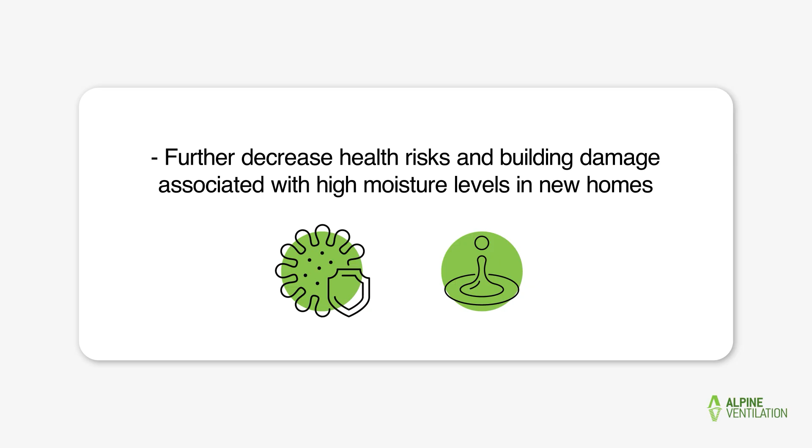The 2022 NCC Condensation Management provisions build on the initial 2019 provisions and are developed to further decrease health risks and building damage associated with high moisture levels in new homes. They are included in both Volume 1 and Volume 2, and are therefore mandatory in all residential home construction.

This video is designed as a simple and practical summary of one of the three sections of the regulation, including suggestions for builders and contractors with developing effective, simple and cost-efficient solutions.

For simplicity's sake, we will refer to the section numbers of Volume 2, the Condensation Management section. 10.8 has three subsections. Subsection 10.8.1 deals with insulation and vapor permeable membranes. 10.8.2 covers exhaust systems and is covered in this video. 10.8.3 covers ventilation of the roof space and is reviewed in our next video.

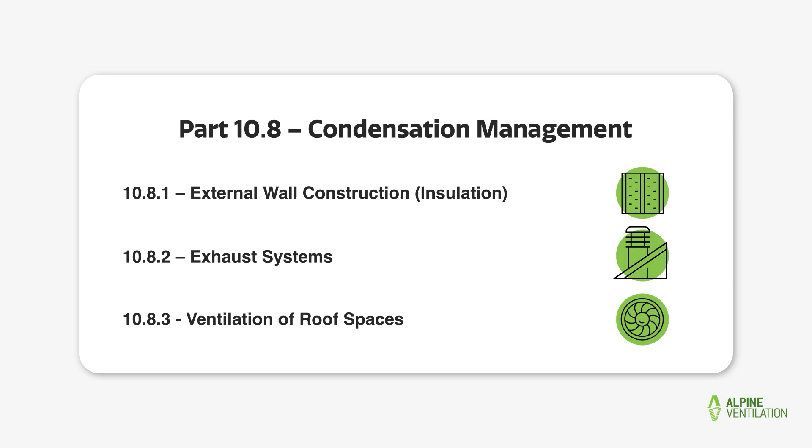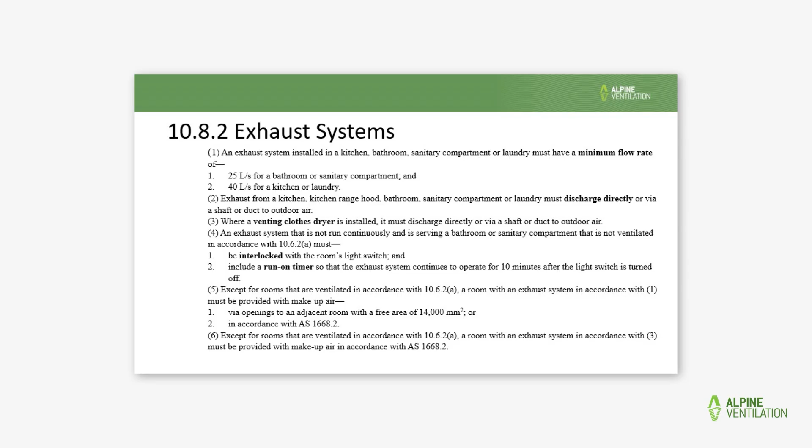Here is an excerpt of the NCC regulation. We will explain this in simple and practical terms.

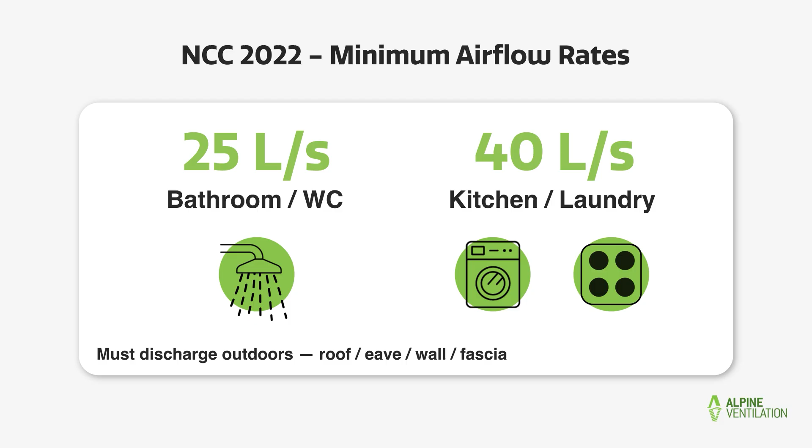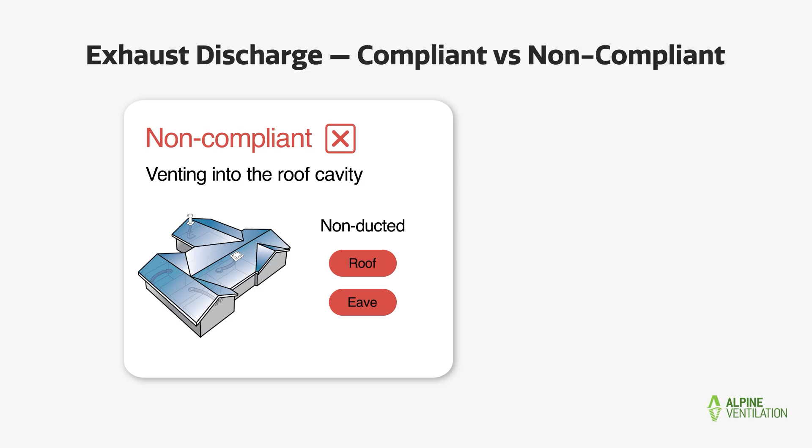Exhaust fans now must be treated as range hoods traditionally have been, and air must be exhausted externally. It is no longer an option under NCC regulations to vent fans up into the roof cavity and use a combination of non-ducted roof and eave vents to recirculate the air in the roof cavity. In our experience, most builders are using a combination of ducted roof, wall, eave, and now also fascia vents to suit different house designs and styles.

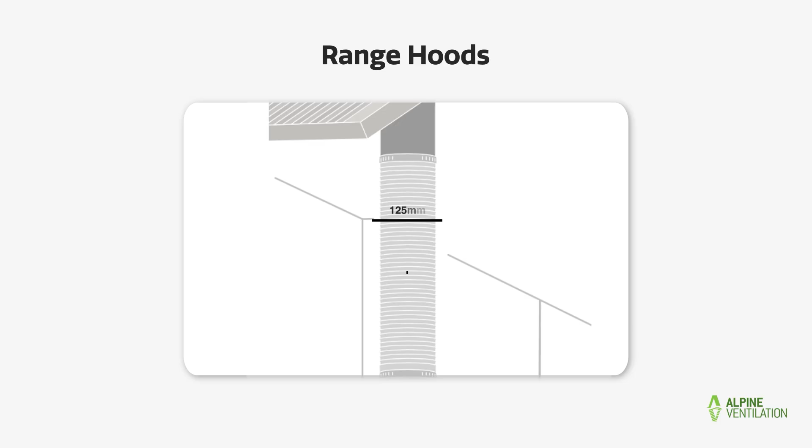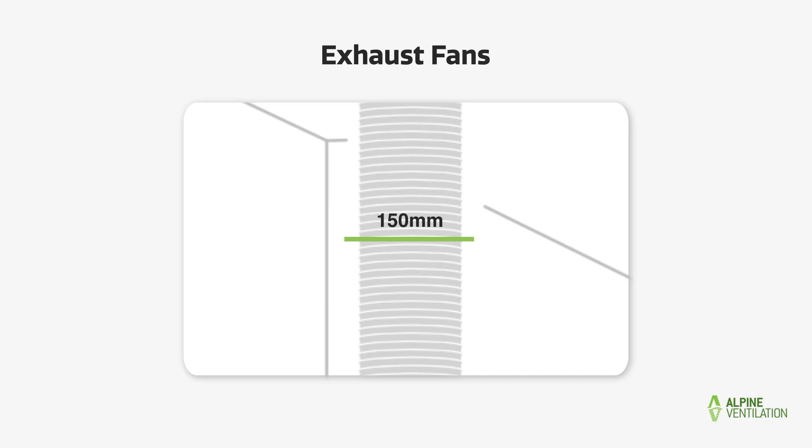Range hoods usually require 125 or 150 mm ducting. The most common duct size for newer exhaust fans is 150 mm diameter. Let's take a quick look at all four options.

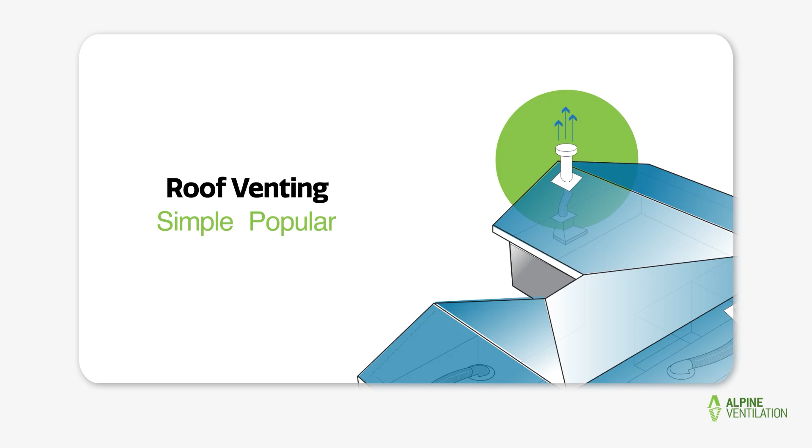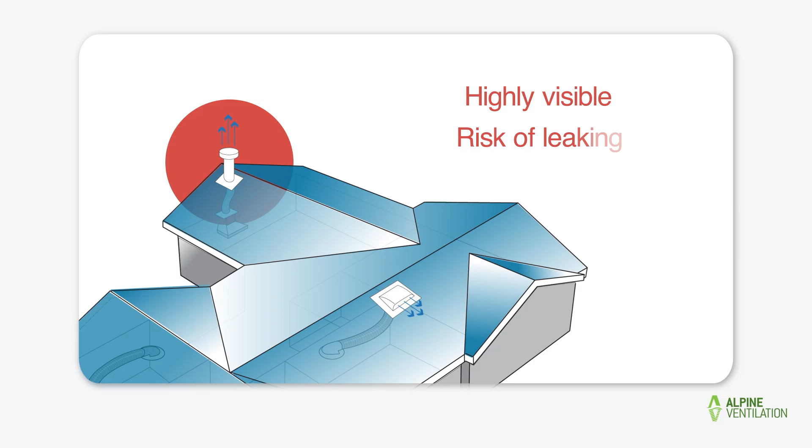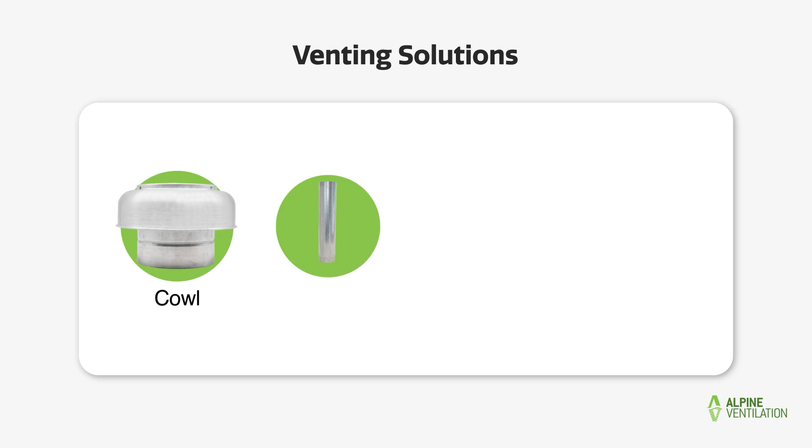Ventilation via the roof has long been popular for venting out range hoods, and remains a simple and popular method under the new regulations. Downsides include roof vents being highly visible, and as with any roof penetration, there is a risk of leaking. We have developed multiple solutions, and all options are BAL 40 compliant, from the traditional cowl, pipe, and flashing, to our compact roof vent.

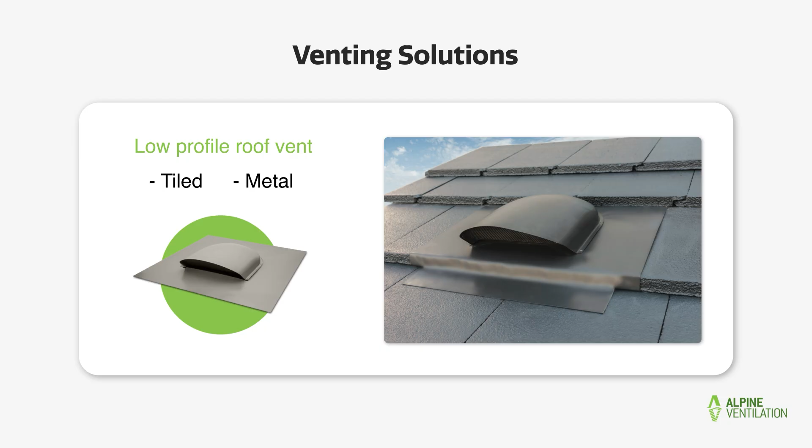Plastic options also exist. Our preferred option is the low-profile roof vent, suitable for tiled or metal roofs and available in 9 Colorbond colors. This can even fit under a solar panel and hence becomes almost invisible on the roof. Check out the separate video on this range.

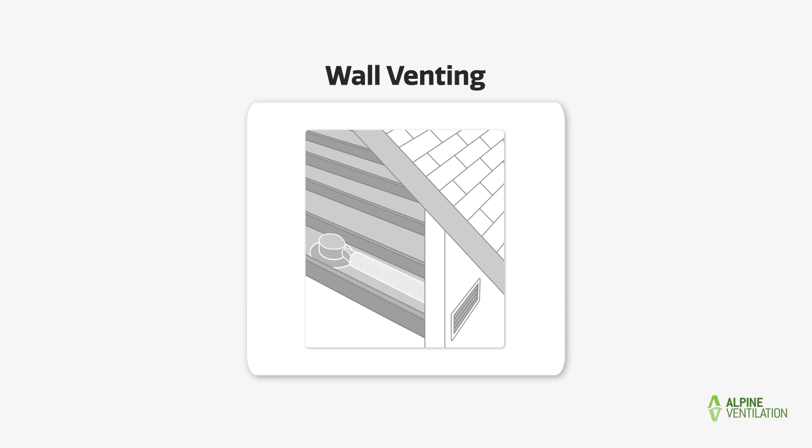Venting exhaust fans and range hoods via the wall is another option, and is particularly popular in single-story homes, especially in brick or weatherboard, but also in cement-cladded walls. Wall venting is discreet and usually well protected from the weather.

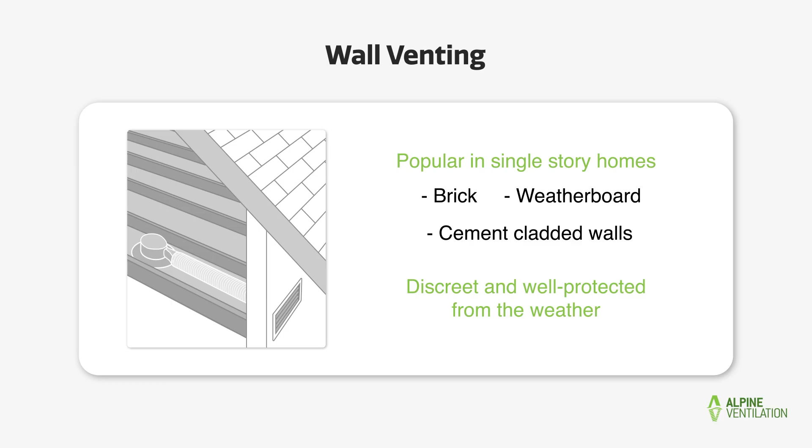Plastic vents may be used, but ensure that plastic is UV stabilized, and check your BAL rating. Generally, aluminium is a preferred material. We carry standard BAL 19 grill vents with mesh. Some prefer gravity vents that prevent backdrafts.

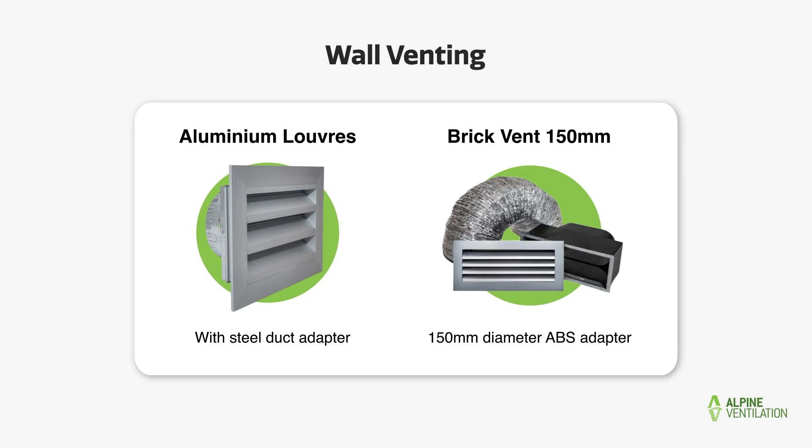Our preferred options are the BAL 40 double brick aluminium weatherproof louvre with steel duct adapter, or the single brick aluminium louvre vent with a 150 mm diameter ABS adapter for an even more discreet look. There is a separate video on this range as well.

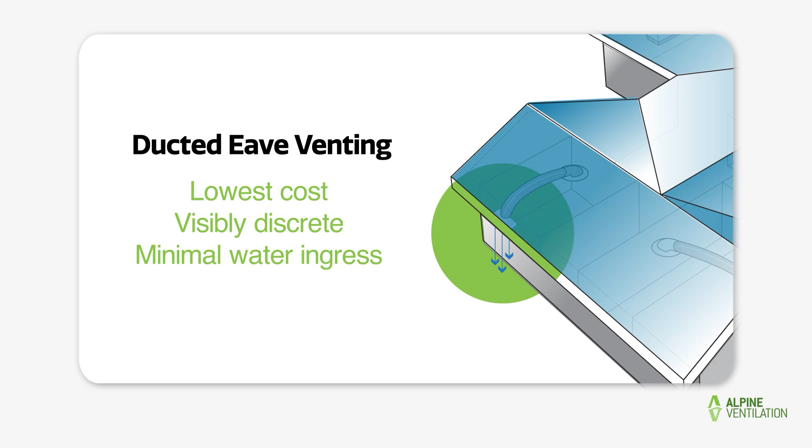Exhausting air via the eave with ducted eave vents is the lowest cost and arguably the most visibly discreet alternative. It also offers minimal chances of water ingress. The downside of eave venting is that many modern homes no longer have eaves. However, if a home has eaves, this can be a great option.

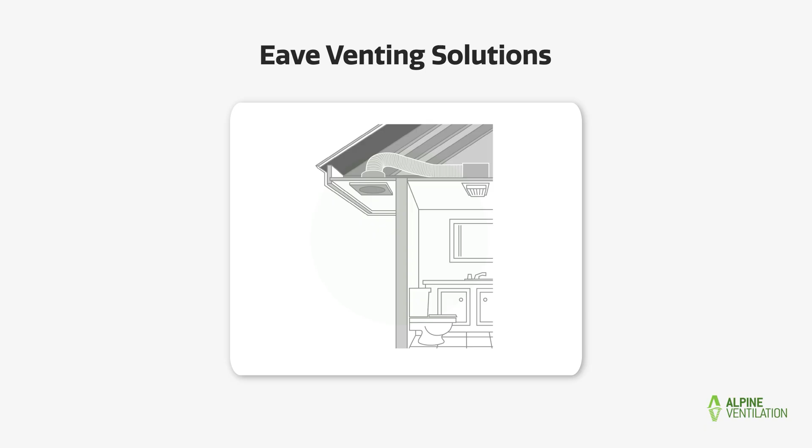There are standard screw-in plastic eave vents. A big improvement is our snap-in eave vents with a longer neck and 3 different face designs to choose from. All have mesh and are BAL 29 compliant.

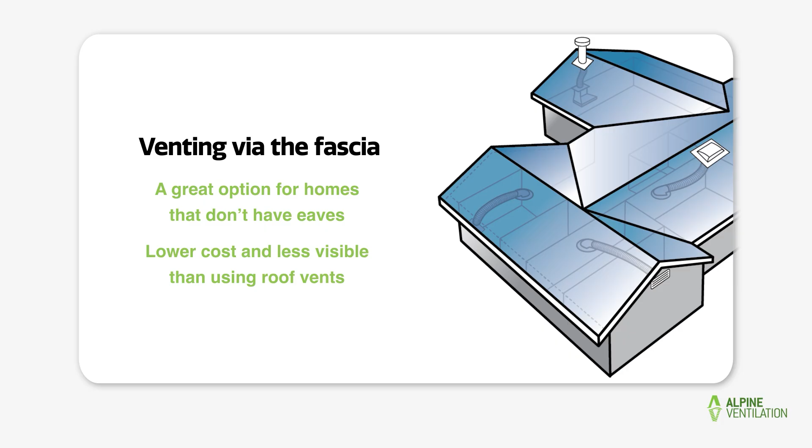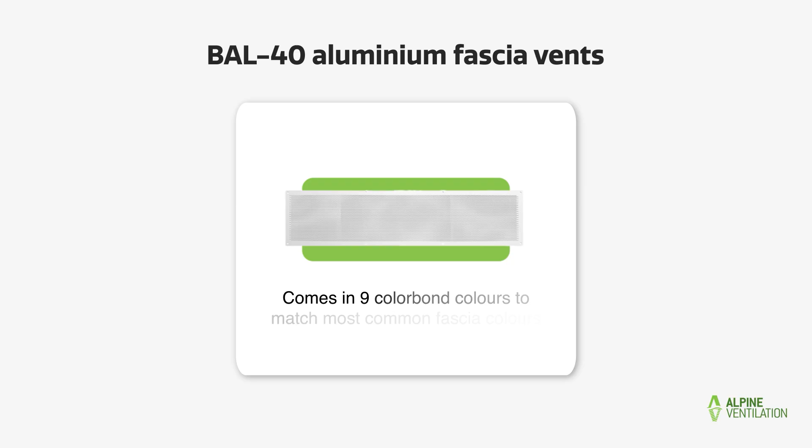Venting fans via the fascia is also an alternative, and can be a great option for homes that do not have eaves. This is a new method, but one that is quickly growing in popularity as it is lower cost and less visible than using roof vents. This is usually installed by the roofing contractor on new builds. Our new BAL 40 aluminium fascia vents come in 9 Colorbond colors to match most common fascia colors.

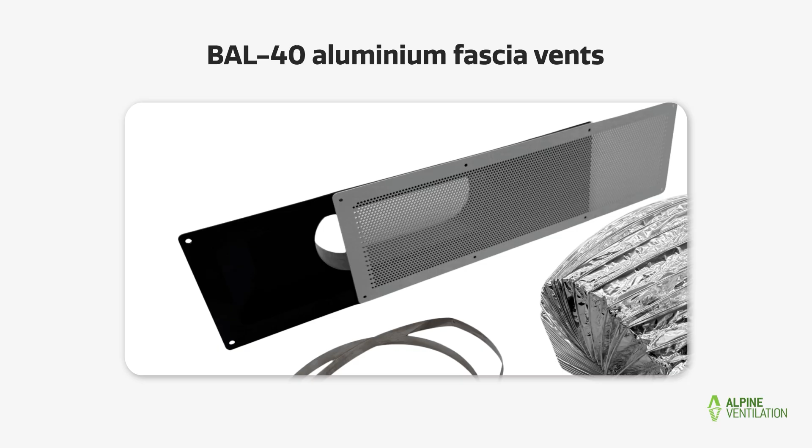A rectangular hole is cut in the fascia. The aluminium face rivets onto the front of the fascia with an adapter attached to the rear for connecting to ducting.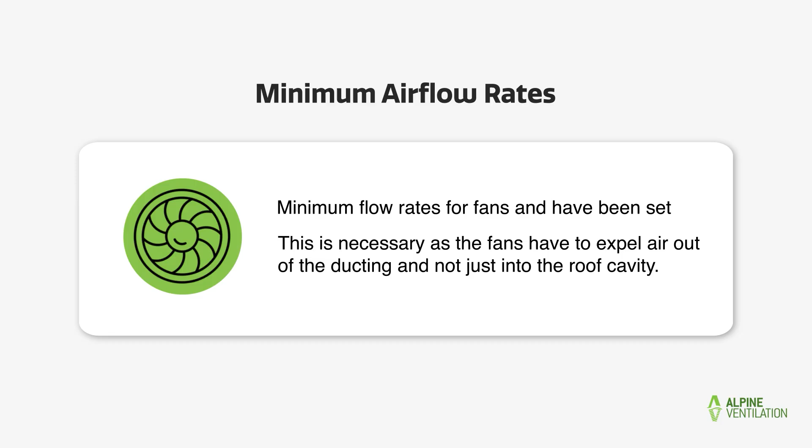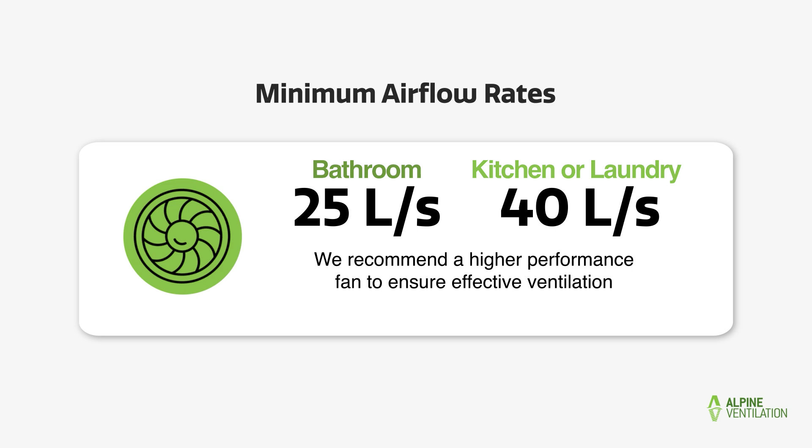Minimum flow rates for fans have been set. This is necessary as the fans have to expel air out of the ducting and not just into the roof cavity. These minimum rates of 25 or 40 litres per second are quite low, and we would recommend a higher performance fan to ensure effective ventilation. Quoted flow rates are under laboratory conditions and will always be lower in residential applications.

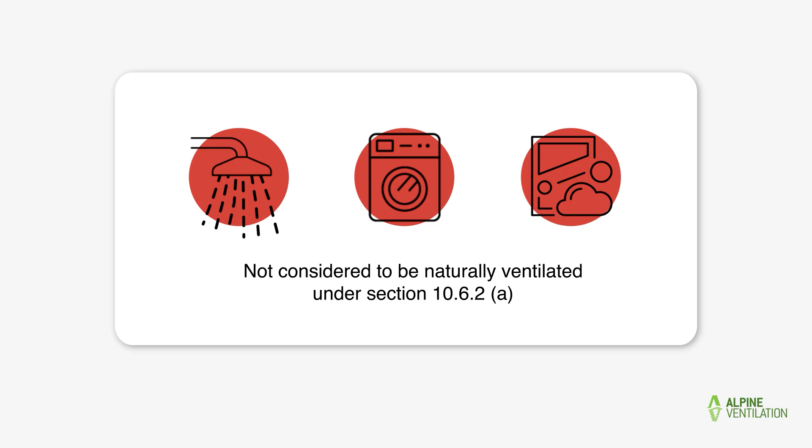If a bathroom, laundry, or sanitary cabinet is not considered to be naturally ventilated under Section 10.6.2a, the exhaust fan needs to be interlocked with the light switch.

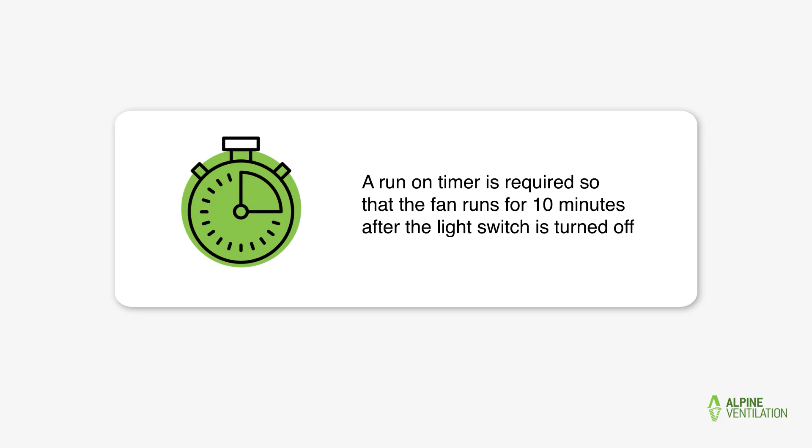Additionally, a run-on timer is required so that the fan runs for 10 minutes after the light switch is turned off. Some fans have a built-in run-on timer, others do not, and require a run-on timer to be hardwired into the fan. When selecting an exhaust fan, consider using one with a built-in run-on timer for easier and lower cost installation. Also ensure that the fan meets the minimum airflow requirements.

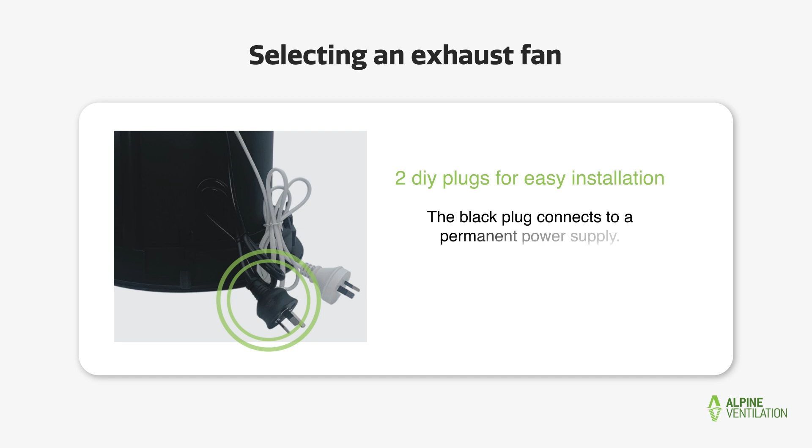The pictured 250SX exhaust fan has a run-on timer with 2 DIY plugs for easy installation. The black plug connects to a permanent power supply, and the white to the light switch loop. At 104 litres per second, the fan is well over the minimum requirements, so is ideal for long duct runs.

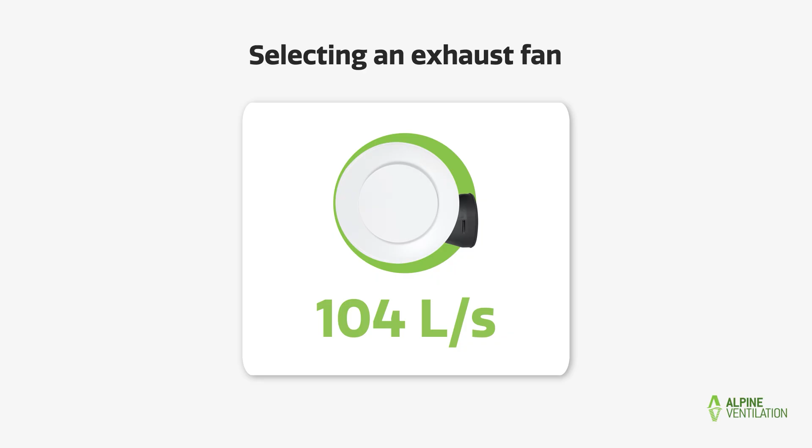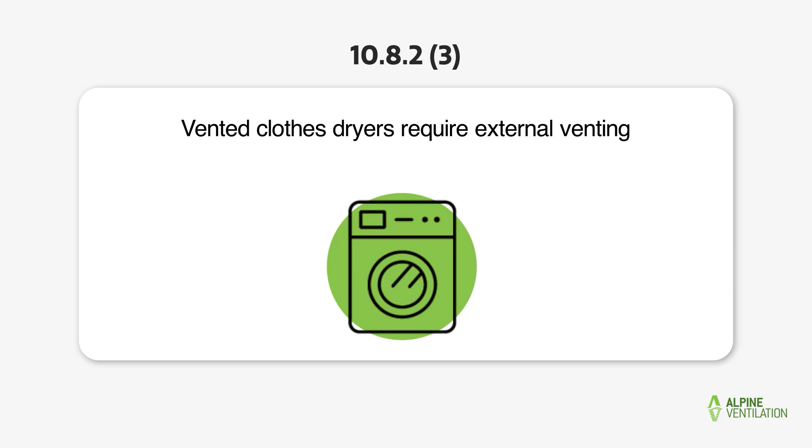Under 10.8.2 (3) vented clothes dryers require external venting. This is usually done in 100mm diameter ducting through the wall with a kit similar to the one pictured. Condenser and heat pump dryers do not need external venting.

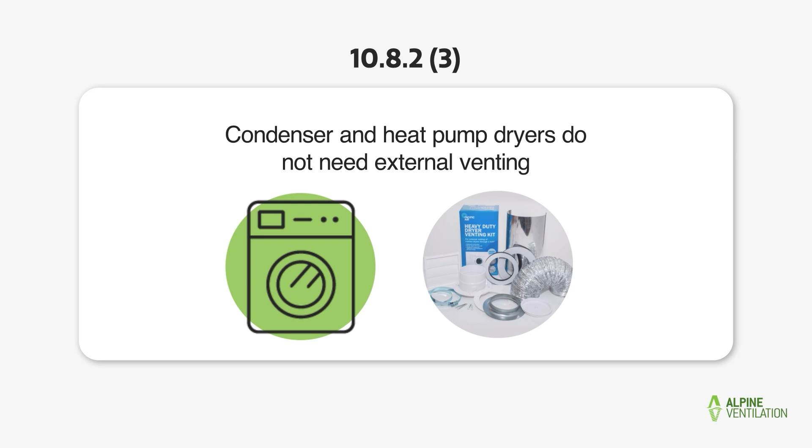As an architectural design issue, rather than a construction issue that has ideally been addressed before the build commences, under 10.8.2 (5) in non-naturally ventilated wet areas, makeup air is required to be provided from an adjoining room or in compliance with AS 1668.2. Ducting is not required to be insulated.

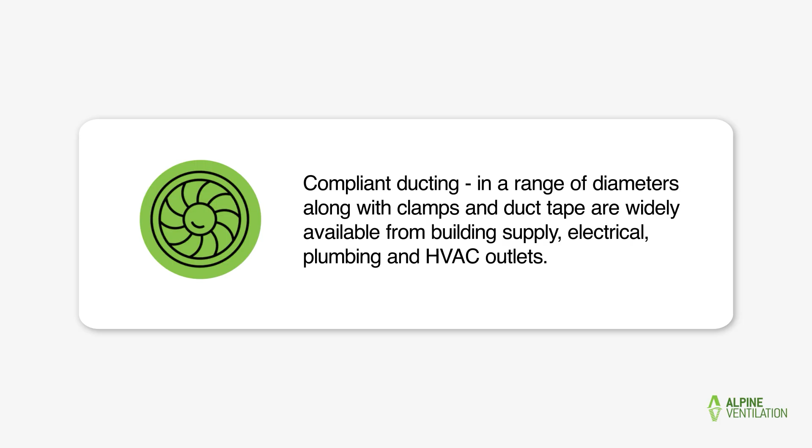Semi-rigid or flexible ducting may be used. We recommend semi-rigid ducting for its higher efficiency. Compliant ducting in a range of diameters, along with clamps and duct tape, are widely available from building supply, electrical, plumbing, and HVAC outlets. Shorter duct runs make for less pressure drop and more effective ventilation.